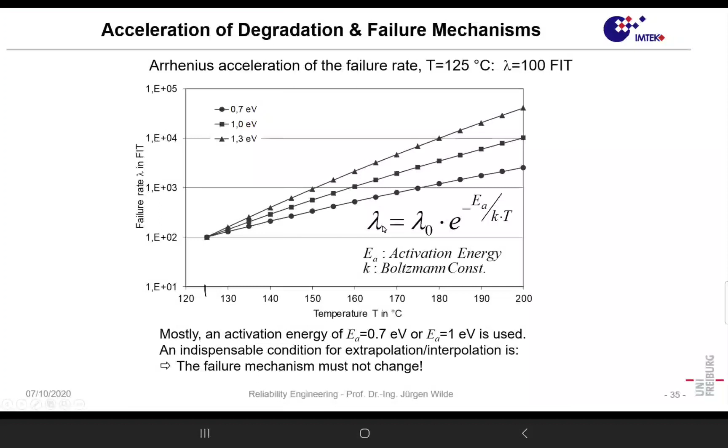Simple model can be dangerous. There are some more models. I will not go into the details of all of these, but it's just to mention. Here we say often not the failure rate is given, but the inverse, the mean time to failure.

Okay, so when we have semiconductor metallization, this metallization fails after some time. It fails in a similar way as the filament of a traditional light bulb fails. So you have a light bulb that lives for a certain time, and then suddenly the filament is broken, and so no more light. So it's a relatively similar process in semiconductor metallizations.

What is also important, it is much more affected by DC than by AC. So DC is worse because DC transports material in the direction of the electrons. So it's somewhat ballistic. So if I take a piece of chalk and always throw it against your bottle, it could move. Okay. In that way, it's a similar process, and the description is, of course, it is affected by the temperature

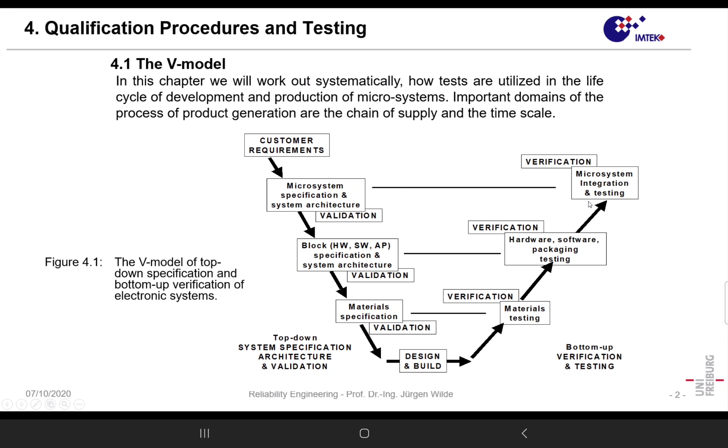That model is quite convincing, but it is also misleading. It looks linear here, but it's rather like a tree going apart, because you have one system, many subsystems, many more subsystems, and so on. So you have many strings going like in a tree or a branch, and then all of the things come together until finally we have a Mercedes car or so. And in that way, that's a standard model of development and verification: specification, development, generation, and verification. Okay, that's an important thing.

Now let's go to a specification. A specification must be correct. You cannot give wrong values. You specify it must bear 100 megapascal, but you made a mistake; you should have specified 200 megapascal. So a specification must be correct. It must be complete. We have seen many failure causes, so a specification must take into account all failure causes. You cannot just say, I regard temperature, but I disregard vibration, humidity, current density, and so on. You must take all relevant things into account. That means complete. So it's a C4 concept. It must be contradiction-free.

As I pointed out, for instance in the aircraft wing, you want to have a certain breaking force, and you specify aluminum as an alloy for building that, and you specify a certain weight. It could be that that is not achievable, due to the fact that you need more material to make it stronger, meaning higher weight. So that also shows us that for such a specification, we also must have an idea of the design.

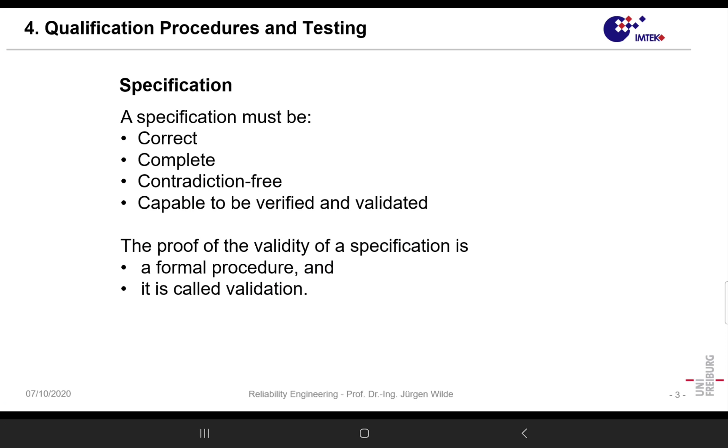So contradiction-free is important, and it must be capable of being verified and validated. A specification where I cannot check neither whether it's valid nor whether the data I specify are achieved is worth nothing. It's a C4 concept of specification. And in that way, specification is very, very important.

Okay, let's go beyond the text. Another thing I derived for MEMS, but also generally for mechatronic systems. We have three main parts. We have the MEMS hardware, the electronic hardware, you could say. Then an important part is software. Software is not so much important for reliability, it's more important for safety, you could say. And then we have generally all of the mechanical parts around it, some hydraulic system or such a thing.

And what is important is that all three parts are typically built in different factories. We have the electronics factory, we have the software lab, and we have the mechanical workshop, for instance. And all three are different worlds, you can say. That's also important because it's a cultural problem. The people working in electronics studied electrical engineering, or electronics and communications engineering, or such a thing.

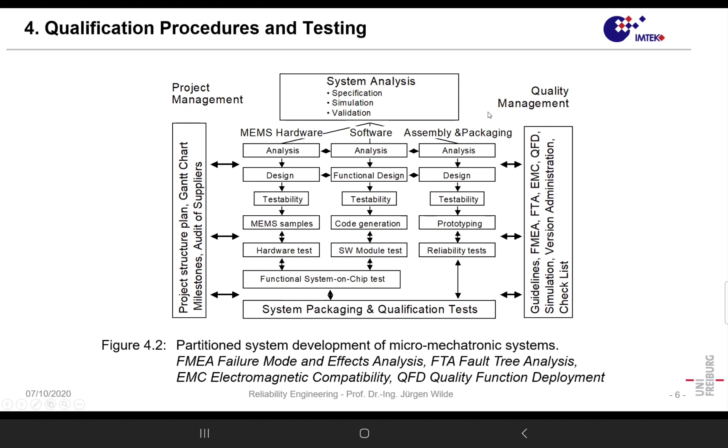Another thing is also important. That's the processes, and the process is the following. Let's say we have a bigger factory like the Bosch company. Let's talk about the sensors they produce, gyroscopes, for instance. At some time they started fabrication, and then they had one model, they improved it, next model, and so in production they have not only product one, but maybe simultaneously 10 versions, and at some time we have a new model.

A similar thing with the Mercedes C-Class, the fifth type in 30 years or so, or sixth type. Because before it comes into production, we have a product development.

Product development is really, let's say, based on the specification in the V model as we saw it. And so you could say when the product was developed, then it came into production. What was also important is often, yes, we have a factory, and that factory has a certain technology, for instance surface micromachining or bulk micromachining or BGA soldering or such a thing.

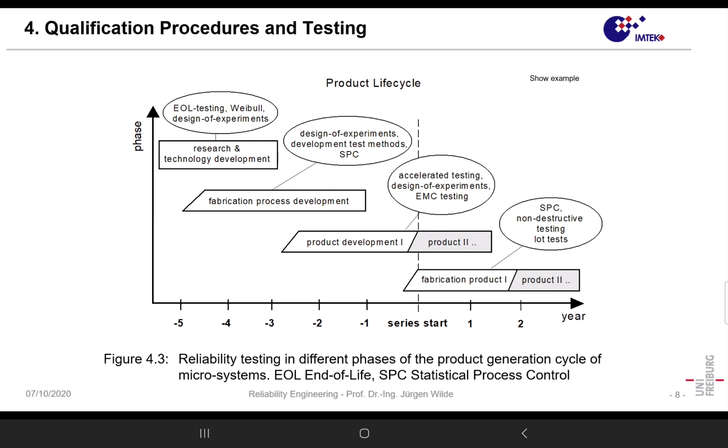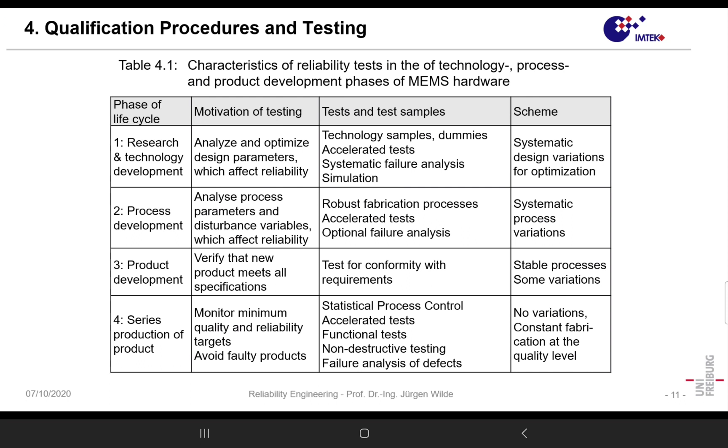But in the end, in the research and technology investigation, you want to know the end of life curve. On the other hand, when you have a running production, you just want to be sure you do not make mistakes. And that's a reason why it's really important at which phase of the development or of the product generation cycle we do the testing. That is specified here. I also already mentioned it. I put it together in a table. Maybe you have a look at that.

Now maybe just some rules in order to develop dependable products. One we already mentioned, we must have a valid specification. Then another rule is minimize the number of parts if possible. Sometimes in a part you have more elements, for instance, in microelectronics, but by cramming more transistors on one chip, you also can increase reliability, because you always treat that as a chip, no matter how many transistors it has. So no risky components. Sometimes you have components which are not so robust, where you can have more failures or early failures.

Then when there is degradation and wear, you want to have replaceable parts. Of course, when you have a printed wiring board assembly, that assembly you cannot repair in most cases. Do not use the safety margins completely, so keep away from the limit. Early testing is important, because one thing is the idea you have what can fail, and the second is what really fails. Computer simulation is important, especially in the development phase, like finite element simulation, but also in dynamic systems or in systems where certain processes develop.

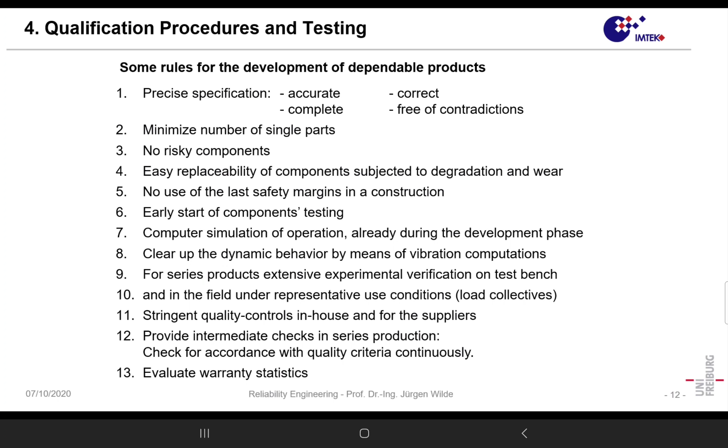Okay. That was it for testing. And so it is very important to know that testing is related to reliability, but it is also related to the phase in which we are with respect to product generation. Okay, thanks for your attention.